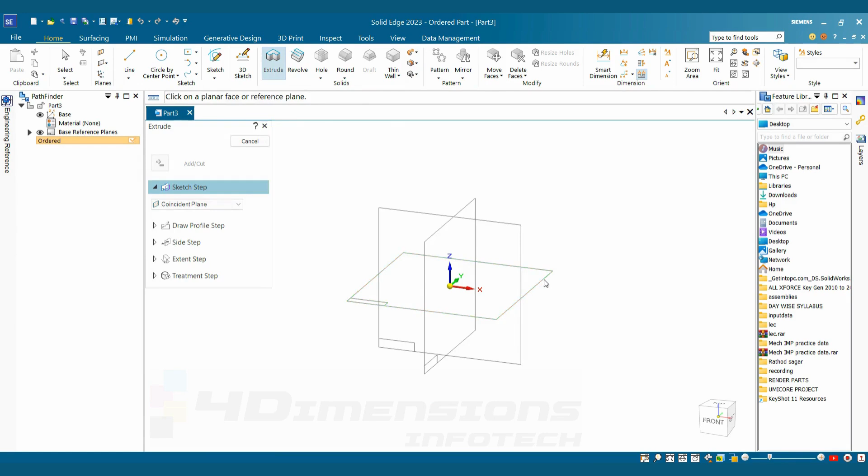So to start with the bottom plate, we are going to go to the software, select new, and say isometric part. I'm starting with the bottom plate here. Select the extrude command and go for coincident plane. We'll make the sketch for the bottom plate. It is a rectangular plate having dimensions: horizontally 250 mm and vertically the side dimension is 150 mm.

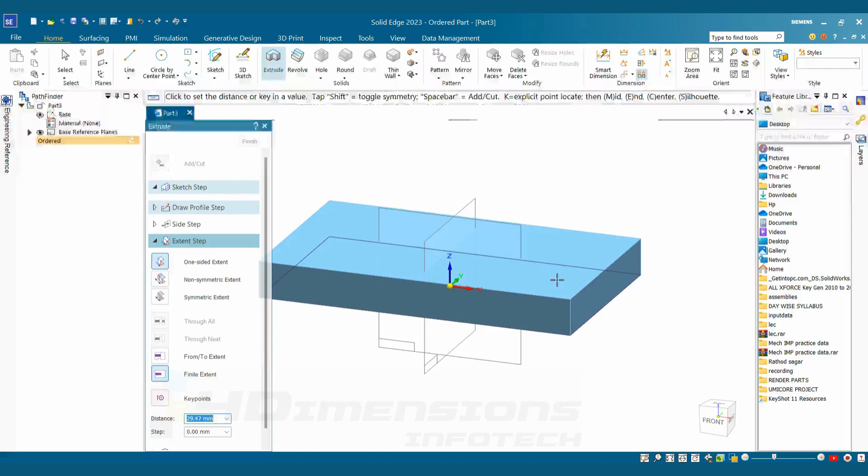Next we are going to say close sketch and extrude this part. The extrusion size was given as 30 mm, so I'm going to say this value as 30. Say finish and cancel. Next, after making this plate, we are going to go for the holes here.

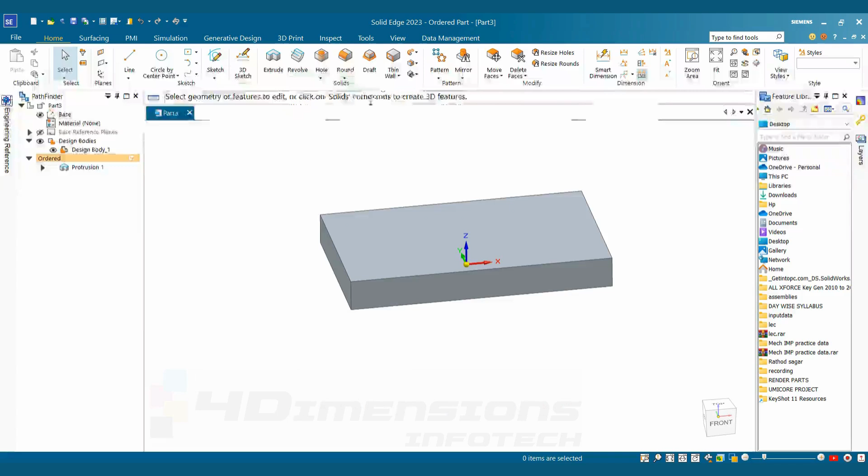So the size of this hole is given as diameter 25, placed at 4 places. Starting with the left side, we can see 30 horizontally and 30 vertically as the dimensions for placing this hole. So we can go for the hole command or we can directly go for extrude cut. I am selecting extrude cut here. The hole command is better to use when we need to make holes for fasteners; since it's just a feature, I'm taking extrude cut here.

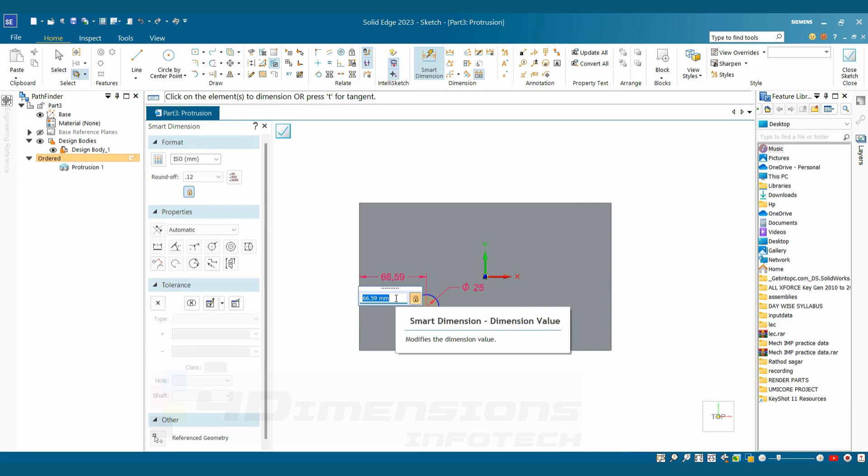Put up the values, say 25 diameter, say auto scale dimensions. Next, put the XY reference dimensions, say 30 by 30. Say close sketch and extrude cut. I'll say through all here, say finish and cancel.

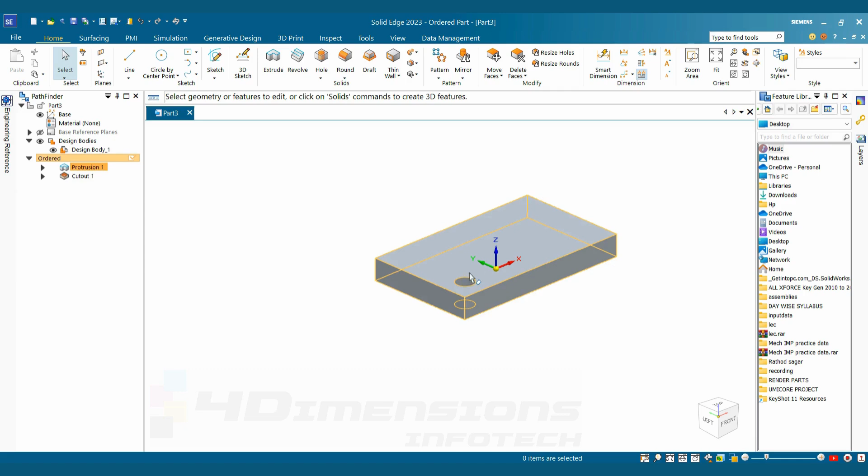Now we need to make a pattern for this feature. This is a very important point: if you are going to pattern the guide pillars on these holes, it is compulsory for us to make these holes as a pattern only. Because if we don't use the pattern feature here, the related part will not be patterned in the assembly also. That's why instead of doing a mirror or making 4 holes together, it is suggested to make the first hole and then go for the pattern command, so as to pattern the related part in the assembly also.

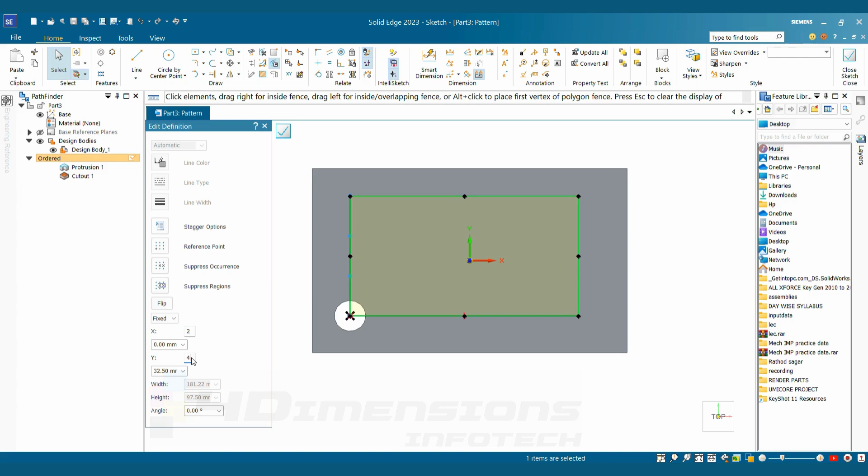Say pattern, select the required feature to be patterned, say OK. Need to select the coincident face, go for the rectangular pattern. We'll select the center of the feature and make a rectangular path here. The type of rectangular pattern I'm going to select is the fixed one. We need to show the XY entities here: number of entities in the X direction, that is horizontal, and Y direction, that is vertical.

Next we need to give the dimensions between the X and Y entities. In the X direction the dimension is going to be 190, and in the Y direction the dimension is going to be 90, measured between the centers of the feature. This vertical distance is given as 90 and horizontally it is 190. So after putting up the values and entities, go for close sketch, say finish.

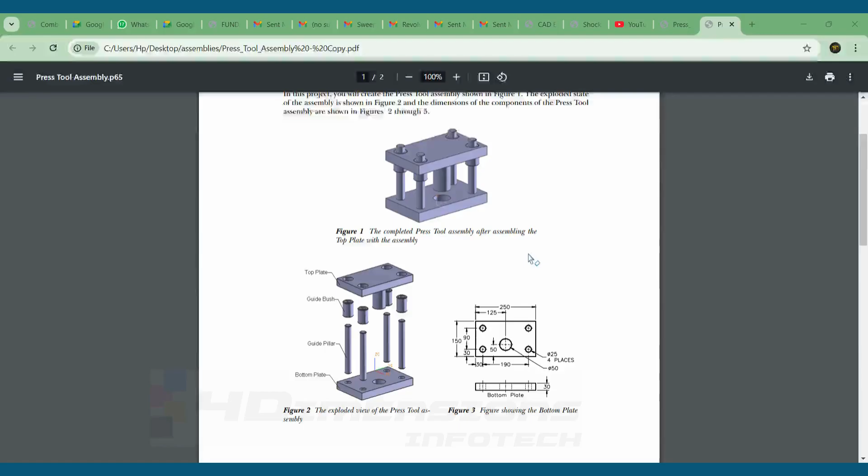Next we are going to go for this cutout. This cut was made with diameter 50. Go for sketch and make the circle with diameter 50. The distance from the bottom side for placing this hole is also given as 50 mm only. So this distance, that is 50 mm from the bottom side, the alignment is with the center origin as the hole is in the center of the plate.

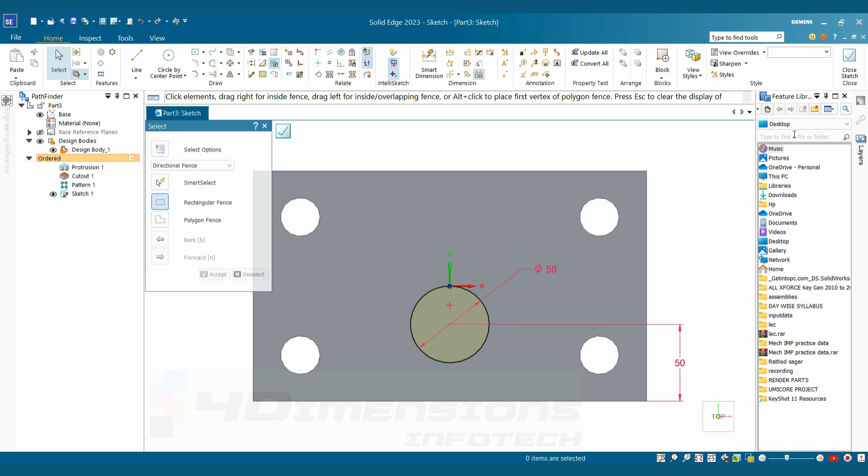So I am going to apply the relation here as vertical. Now this complete placement of the circle has been made. We are going to cut the circle here, say finish, say cancel. Go for this extrude, select the sketch, say OK. Next, say cut, finish and cancel. I'll hide the sketch here.

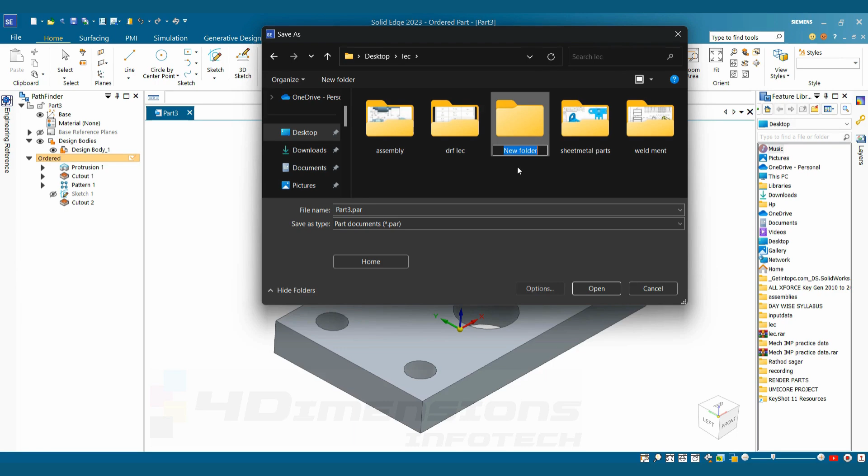So now after completing this part, we are going to save this part. I'll make one folder here, and in the folder I am going to save this part with the proper name. The name for the part was given as bottom. Here it is very important to save with the proper name given, so I am going to say bottom plate here.

Say save. We also need to apply the appearances here. I am going to go into the view tab, part painter, and this part has been completed with the appearance also now. Say save. Next we are going to go for the top plate.

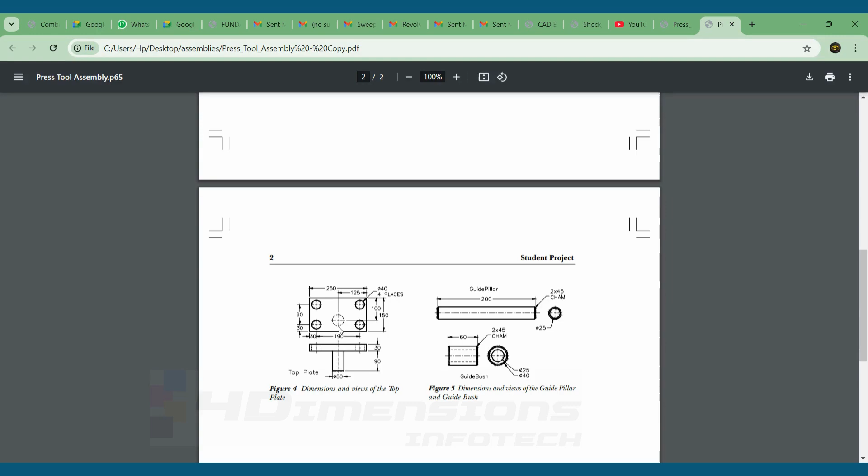It is having similar dimensions as the bottom plate except these diameters are being changed, and it is having one shaft instead of a hole. So we can edit this part only, instead of making another part. I'm going to edit this part only and say save as with a different name. So here for the cutout, I'm going to edit the dimensions here.

So instead of 25, we need to say 40 diameter. The locational dimension will be the same. We'll also remove this sketch here, and at the bottom side, I'm going to add the circle.

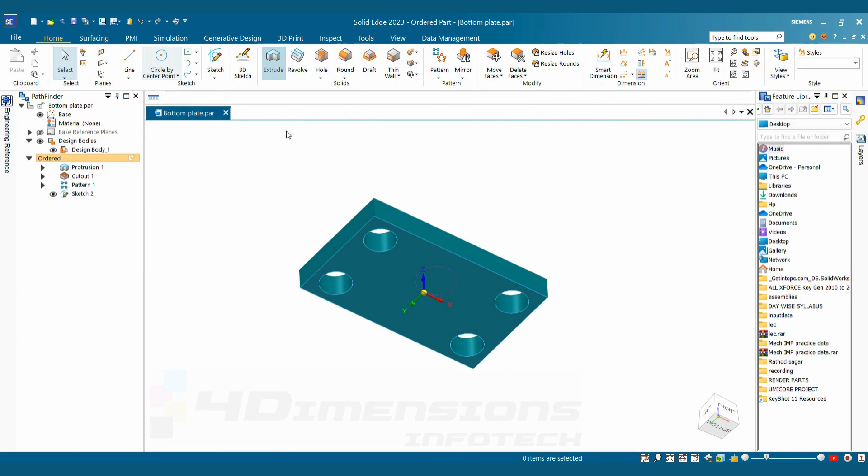Diameter will be same 50. Location from the bottom side will also be same with the value as 50. Say finish, cancel, say extrude. Select the sketch required and we are going to extrude it here.

Say one-sided extrude and end condition will be finite. The dimension given for this extrusion is 90, we can see here. I am going to say 90. We'll hide the sketch and now this top plate is also completed.

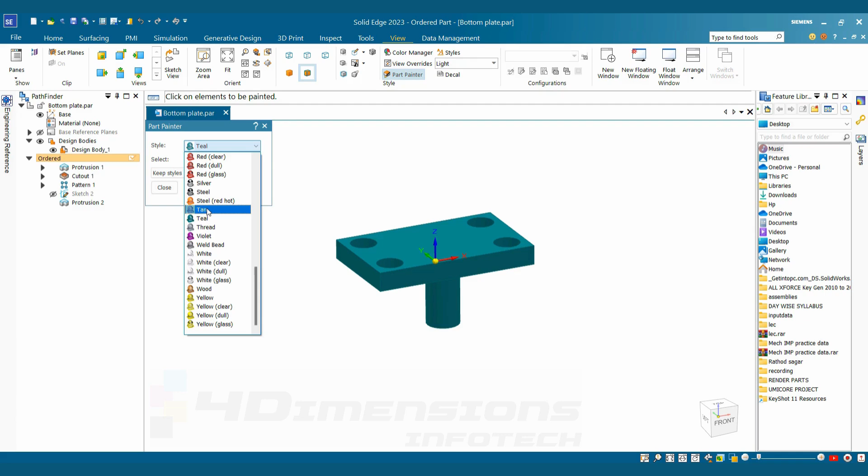Say part painter, and instead of this color I am going to say tan. Select the body, say close, and instead of directly saying save, we are going to say file, save as, so we can change the file with another name.

So now this bottom plate and top plate have been made. We are going to go for this guide pillar and guide bush now. The guide pillar having length is 200 and this guide bush is having 60.

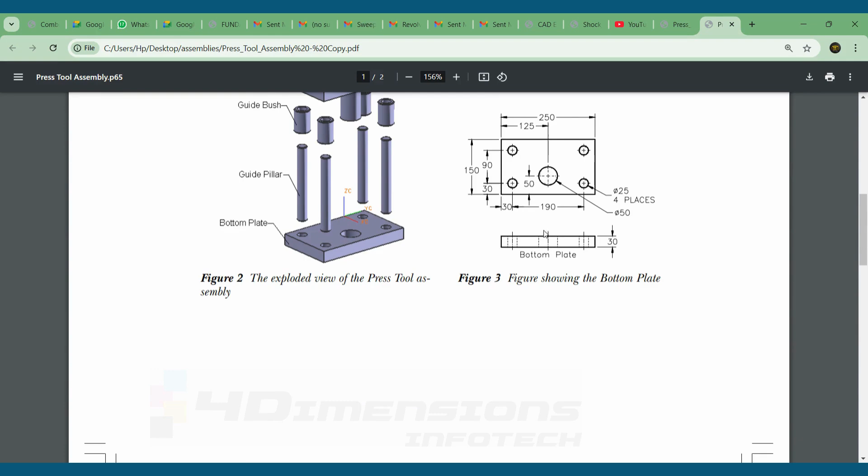Diameter of this guide pillar is 25 as it is going to be assembled in these holes. The diameter of these holes were also 25, and then the guide bush diameter will be 40 as it is going to be assembled in this top plate having the diameter of 40.

So these guide pillars will be inserted in these plates and are going to have this guide bush on the top, and lastly top plate. So while assembling we need to call first part as bottom plate, then guide pillars, then guide bush, and lastly top plate. Next part is guide pillar.

So I'm going to say file, new, isometric part, and instead of extrude we are going to say revolve this time. It is better to make any shaft by revolve command instead of making it by extrude. That's why I'm making this shaft by revolve command here.

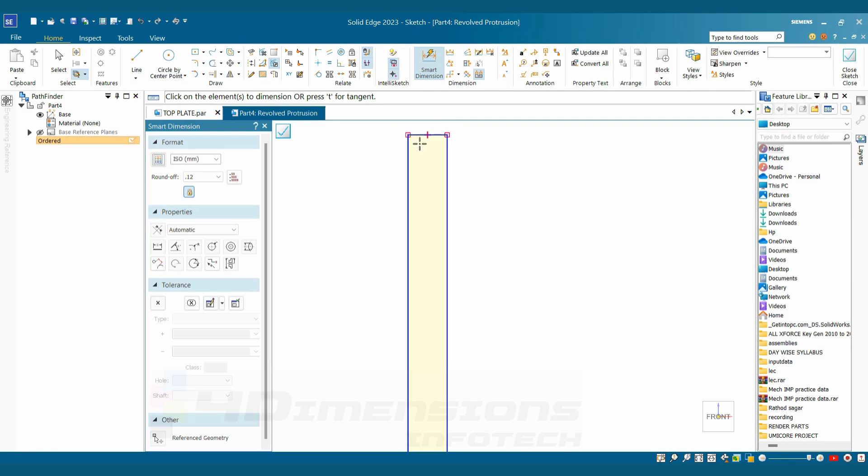I'll say 2-point rectangle. Diameter was 25, I'm going to say this radius as 12.5. As we are going to revolve this part, that's why I'm taking radius. The length was 200.

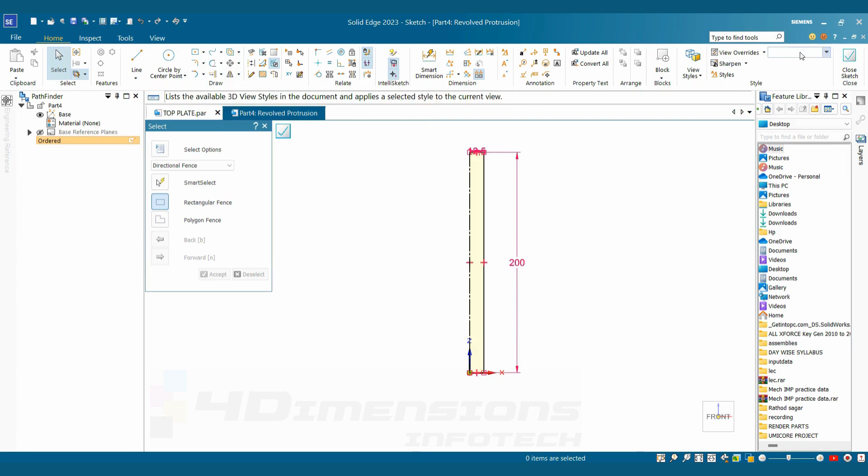Say close sketch, it will show error, as we have not selected axis of revolution. We are going to go for that command axis of revolution and select this line as axis of revolution. Say close sketch.

And you can see this part has been revolved here. Say finish and cancel. Next we are going to go for the chamfers here.

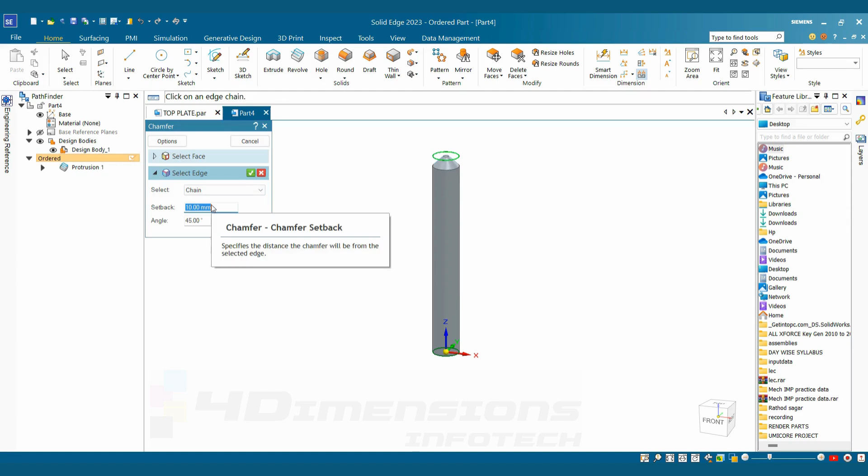We can see this guide pillar is having chamfer at both the ends of 2 into 45 degrees. So again chamfer, select the face, say OK, select the edge required, and say size as 2 into 45. Same, cancel, and repeat the command chamfer. Select the face, say OK, select the required edge, and say OK again.

Say finish, cancel. We are going to apply lastly the appearance here, blue color, say close and finish. We need to save this part with proper name as guide pillar.

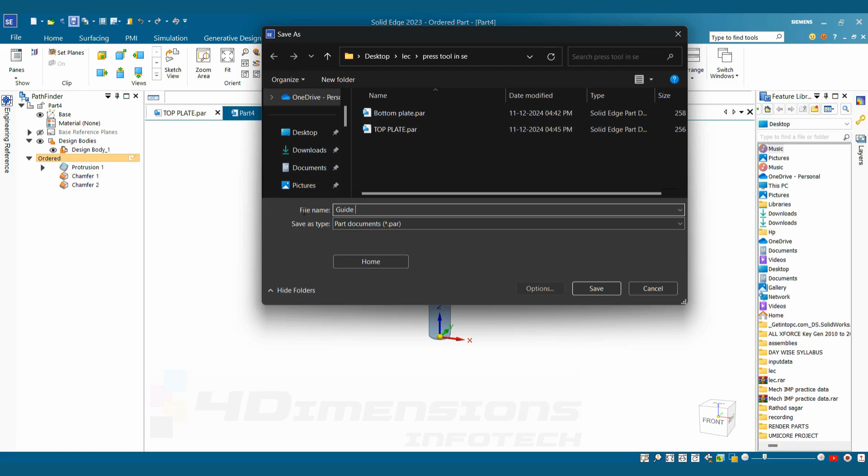Next we are going to edit this guide pillar only so as to convert it into guide bush. So for that I am going to edit the dimensions, saying dynamic edit. Instead of 200 I am going to say it's 60, as the height of this guide bush is 60, and diameter of the outer side is 40 and inner side will be 25.

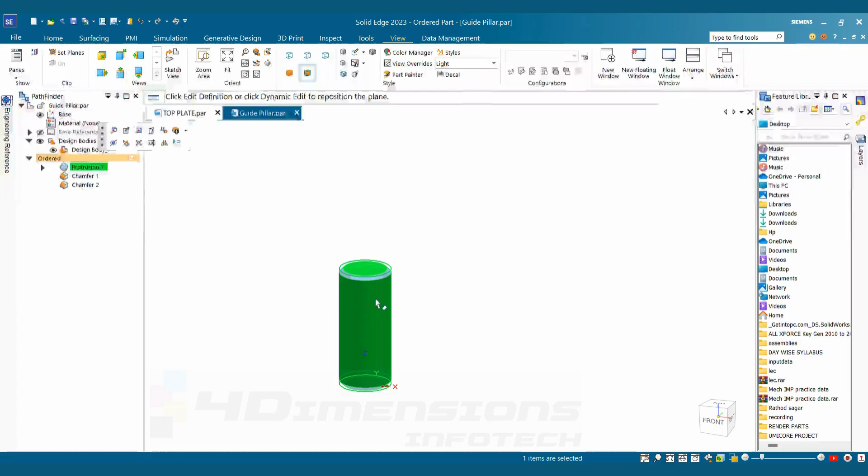So we need to make this cut. After that we need to edit the diameter also, so instead of 12.5 I'll say 20 as the radius and diameter will be 40. Next we also need to make one hole here.

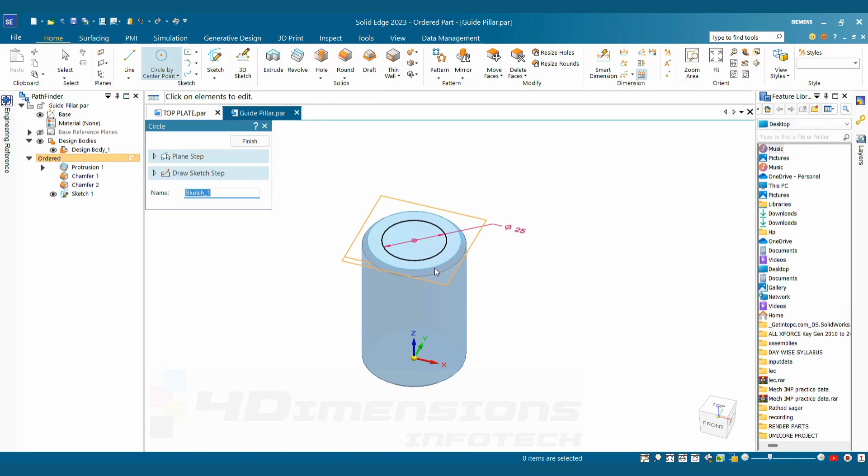So I'll draw one circle, say 25 diameter, close sketch, and now we are going to say extrude cut. Instead of add we are going to say cut here and say through all as an end condition. Say finish and cancel, so you can see here this cut is also been made.

We are going to change the appearance again, so I'll say orange to this guide bushes here. Say close, we'll save this part now, so we'll say save as again.

We just need to change the name here. Instead of guide pillar, I am going to say guide bush.

Now all the parts of the assembly have been completed. We are going to gather this part and complete the assembly.

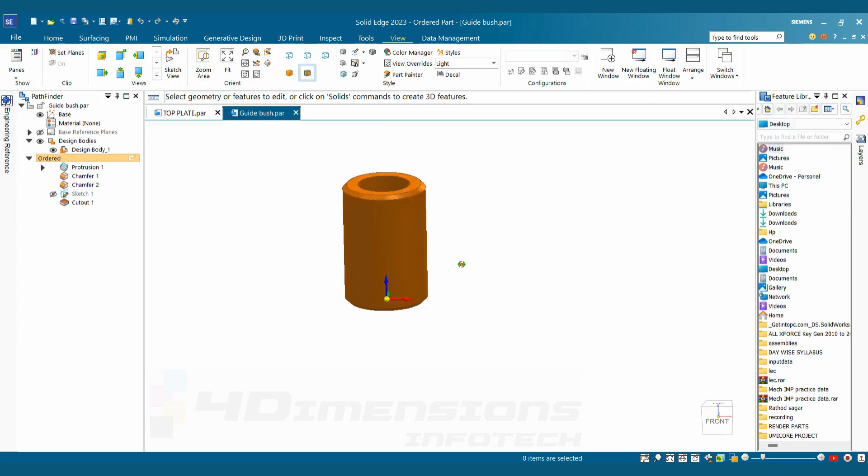So for starting the assembly, I am going to say File, New, and we are going to say ISO metric assembly. Here the ISO metric assembly has been started. Now you can see this interface. This is the model tree area, and this is the command which we are going to use to call the parts and assemble them together. So to start with, I am going to say insert components.

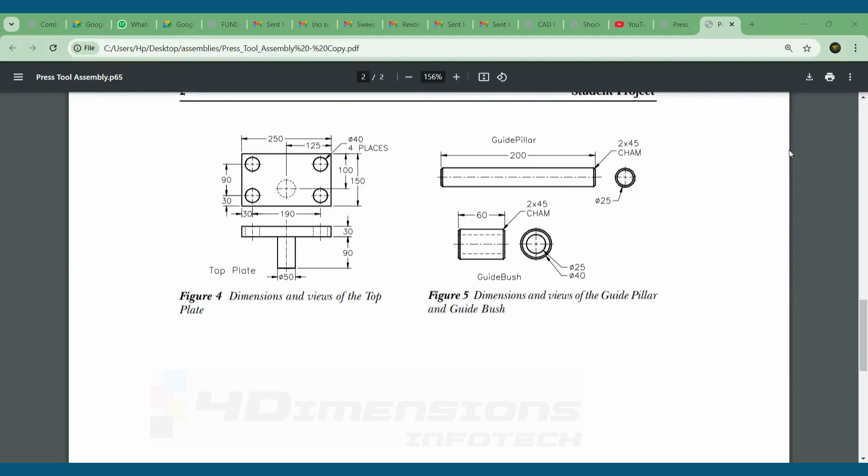We need to browse the files. So I'm going to go on desktop and browse the file by searching the folder in which we have kept this part. Here we can see the bottom plate, so I'm going to call the bottom plate first. As we can see, at the bottom side is the bottom plate, and then we are going to go for the guide pillar. So, this bottom plate - just click and drag it into the assembly zone.

Now the first part has been dragged and called here. Now these are the assembly tools known as mates, which we are going to use for making the assembly. So here you can see one mate is given, that is ground mate. Ground mate is used to make the part fixed.

So whenever you call the first part in the assembly, you can see this symbol in the model tree - the ground mate symbol has been applied on this part. And if we keep the arrow on this bottom plate, you can see a note appearing showing that the part is grounded here. So we can consider that the part is fixed here. Grounded means the part has been fixed.

But it does not have any relation with planes and all - it doesn't have any relation with origin also. It is just fixed at the place of origin, not having any relation with planes or origin.

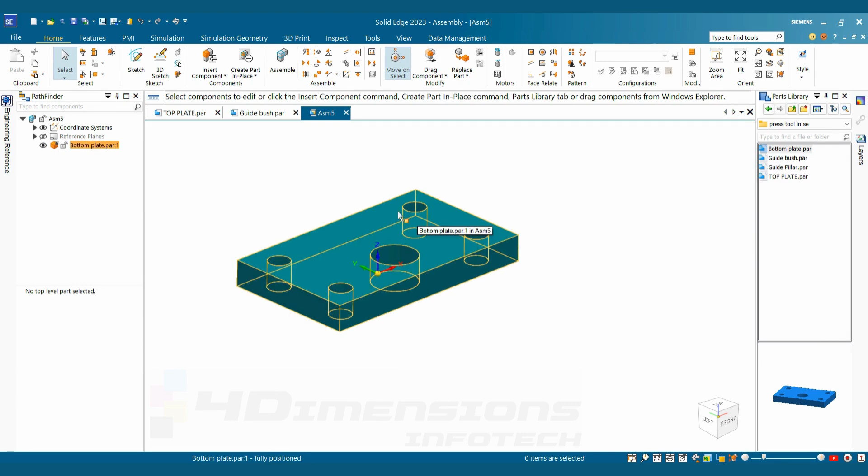So we can continue the assembly in this way also - making this base part a fixed part and then assembling the other parts. Or else we can match the planes of the parts with the assembly planes and then assemble all the parts. That option will be better, but it is a little bit lengthy process. So some companies avoid that, but we can go for that option also.

So for that we'll click on this part, and you can see after clicking this part, at the bottom left side, the mates related to the selected part are highlighted. So whenever I click on other parts also, the related mates for those parts will be highlighted in the model tree area at the lower left side.

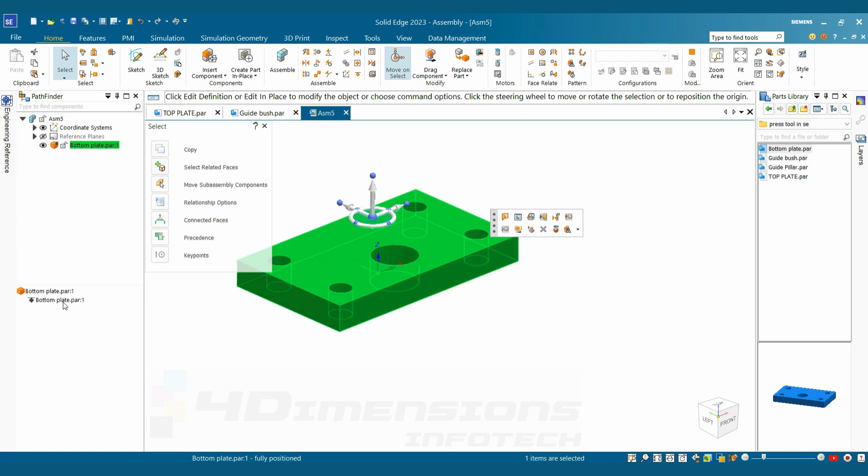So here we can see that the bottom plate has one relationship, that is ground mate. We are going to observe what effect the ground mate has on the part. So for that I'm going to select drag component and click on the part. But if we drag this part, it is not movable - it is because ground mate has been applied to that part. That's why it is not moving.

So if I want to move this part in any direction, first we need to remove the ground mate or delete the relationship. Select the part to delete the relationship and say delete. Now if I say drag component, you can see this part is movable now. So I'll place it somewhere here.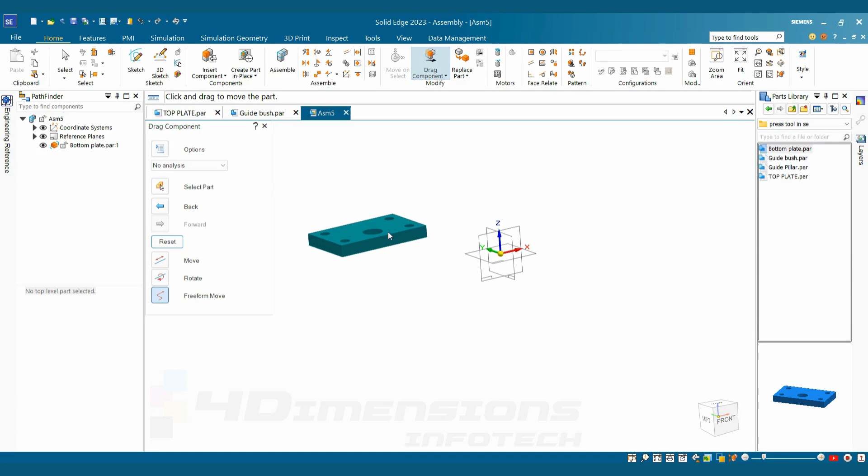And now I'm going to turn on the assembly planes here. So here you can see the assembly planes are on. We also need to show the part planes if we need here. So for that I'm going to select this part, right click on it, and you can see an option appearing - show/hide component. Select that option, say reference planes on, say apply and OK. So now the planes of this bottom plate are also highlighted here.

It is because we are going to mate this part with the origin by using planes only. We are going to apply mates on these planes so as to match the center of the assembly with the first base part. So for that I am going to use these relations here.

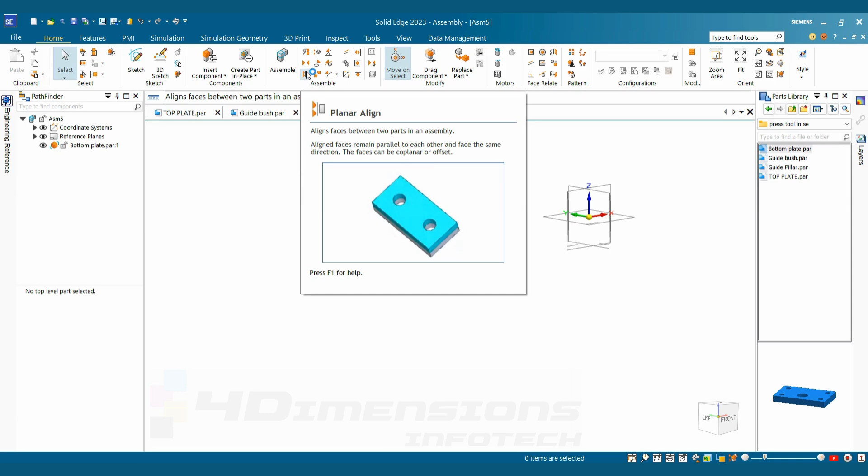So we'll start with this first relation here as planar align. This relation, or mate, is used to make the faces or planes coincide together - usually planes, that's why the name is planar align. So I'm going to use this option as planar align and then go for the selection of planes so as to match them together.

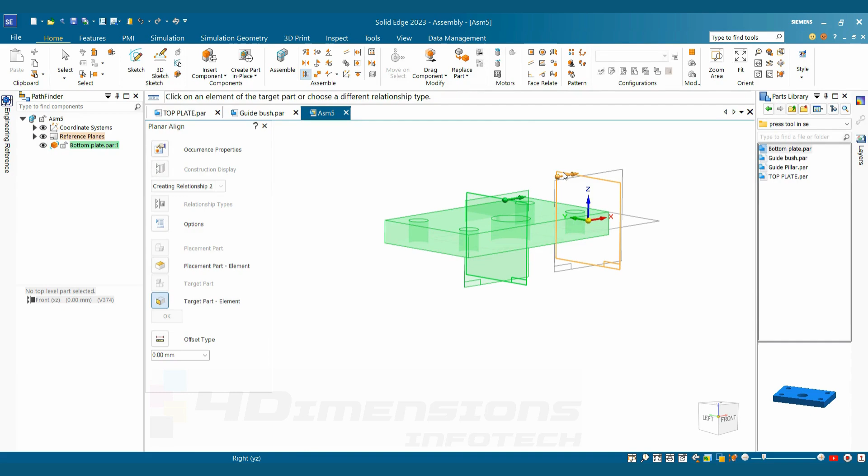For applying mates on the planes, we need to select the part planes first. So I've selected the front plane of the plate and then go for the selection of assembly planes. So here you can see front to front is matched. Next, I am going to select the part right plane with reference to the assembly right plane - so these two are also matched.

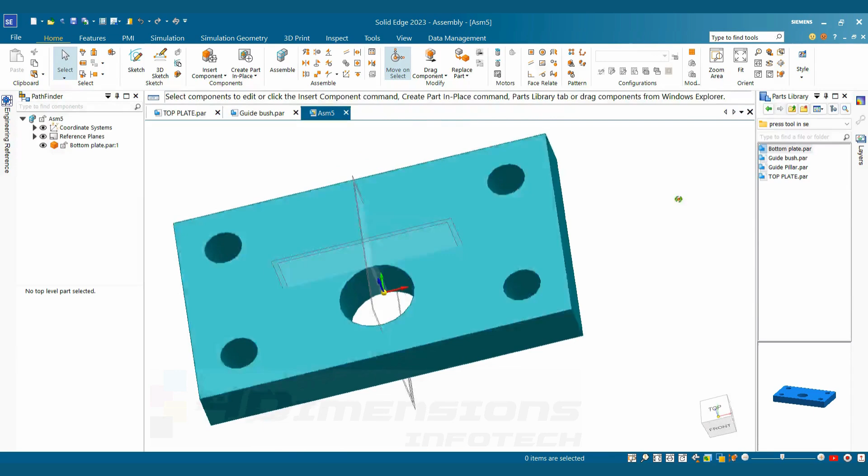Next we are going to select the part plane and the assembly top plane. Now all the planes here are matched, and this part is again aligned with the center of the assembly. You can see all the part planes and assembly planes coming at the center of this plate. It is also very important, while making this part, that we should use center references only, so as to get the planes at the center of the part while assembling. Next, after clicking this part, it will now show three relationships here, three mates.

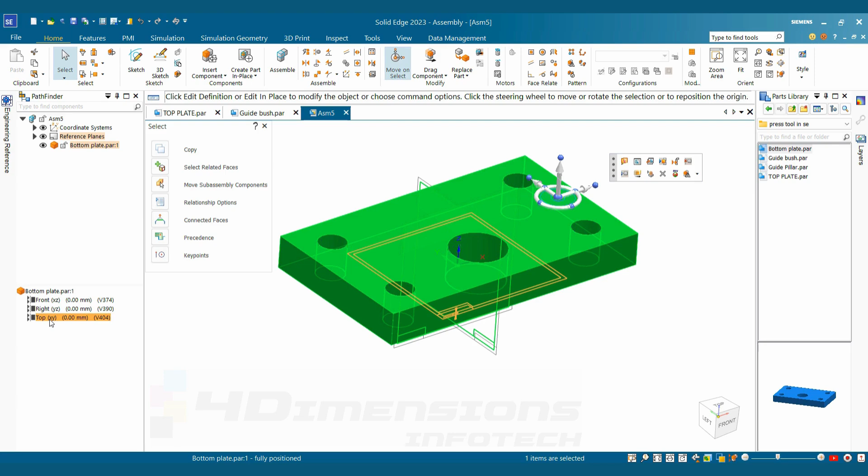That is front to front, front of assembly and front of plate. Same goes with right and top, so all the planes of the part are matched with the assembly planes. We have done this in SolidWorks also, and we are continuing it in Solid Edge, as well as it is preferable in other softwares also, that we should match the planes first and then go for the assembly.

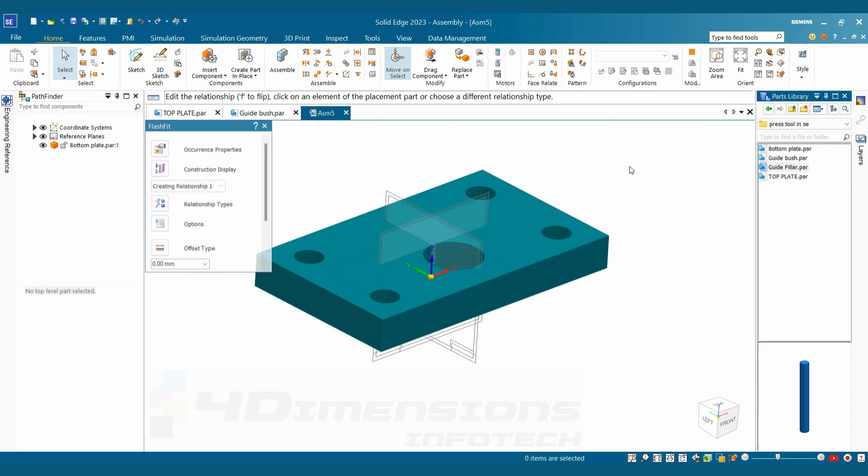Now next we are going to call the other part, so the other part is going to be guide pillar here. You just need to drag the part. While making the part, you also need to remember what are the orientations for the part in assembly, then only make that part according to the orientations of the part in assemblies. So this guide pillar was going to be assembled vertically here, that's why I've made this part in vertical condition only in part modeling.

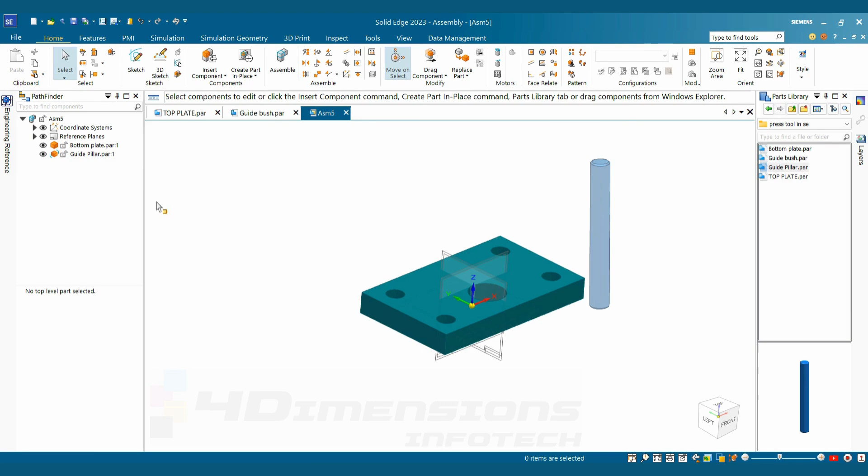Next, go for the mate. So here the mate we are going to use is axial align. We can see the demo also there. It is used to match the axis of two cylindrical parts, maybe hole or shaft. I'm going to select that axis now. You just need to drag on the part while selecting the mate, and the axis will be automatically highlighted. Just select the axis of the guide pillar and then select the axis of the hole.

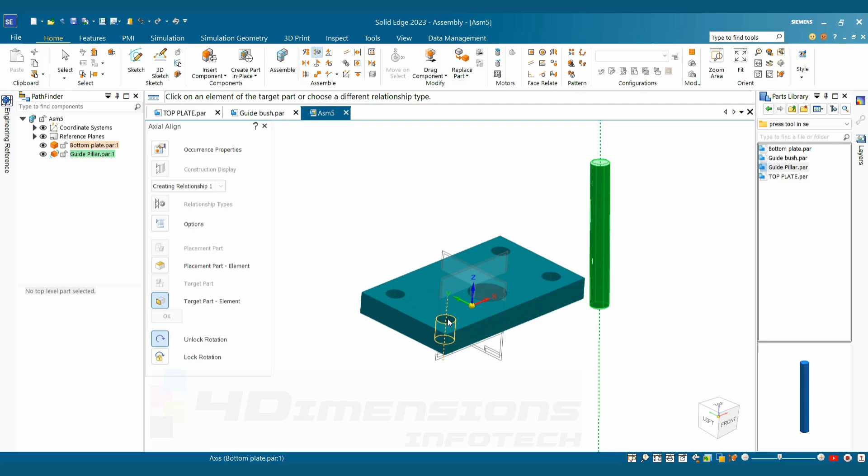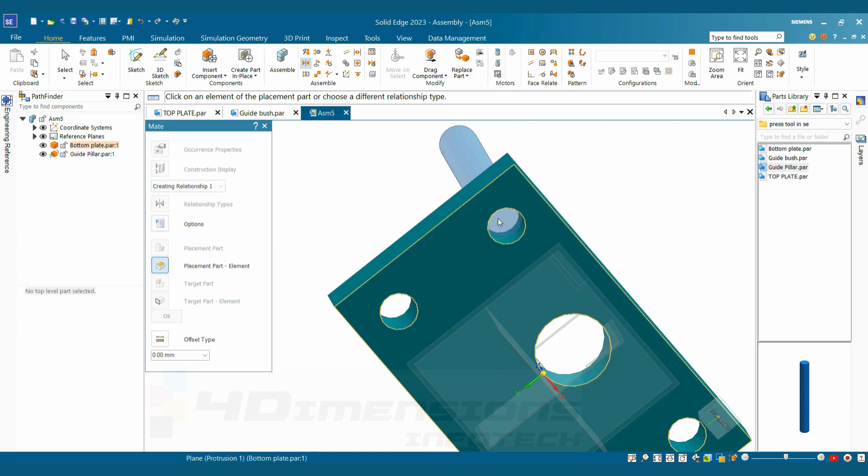Next we are going to go for the faces. So for that I'm going to change the relationship and say the relationship as mate. This relationship is used for mating the faces here, flat faces. So I'm going to go for that relationship here and select the faces. The selections for the mate will be base of the guide pillar and base of the bottom plate.

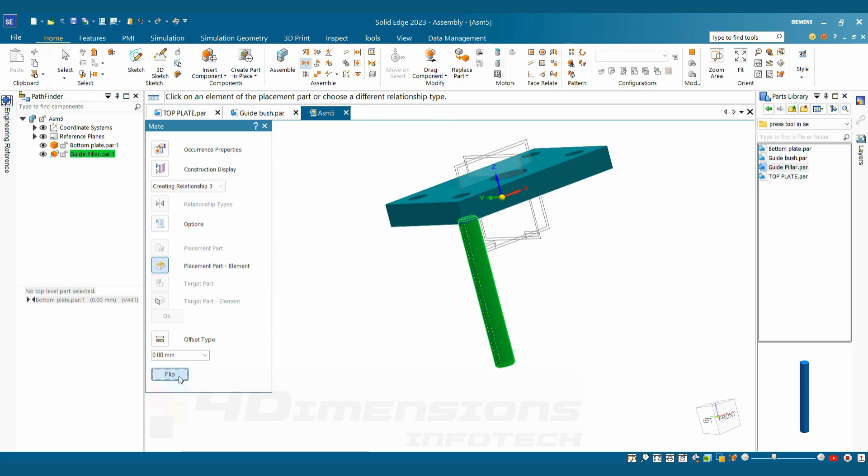Now the orientation of this guide pillar is coming at the lower side, but according to assembly we need to make it oriented at the upper side. So for that in mate only we can flip the orientation of the part. You can see here this option. In this mate options, just say flip and the orientation will be flipped here. Say right click and escape.

Next we are going to hide the planes here. Also hide the part planes. Right click on the part, again go to show hide components and say planes off. Say apply and OK. Now the planes of this bottom plate are also been hidden.

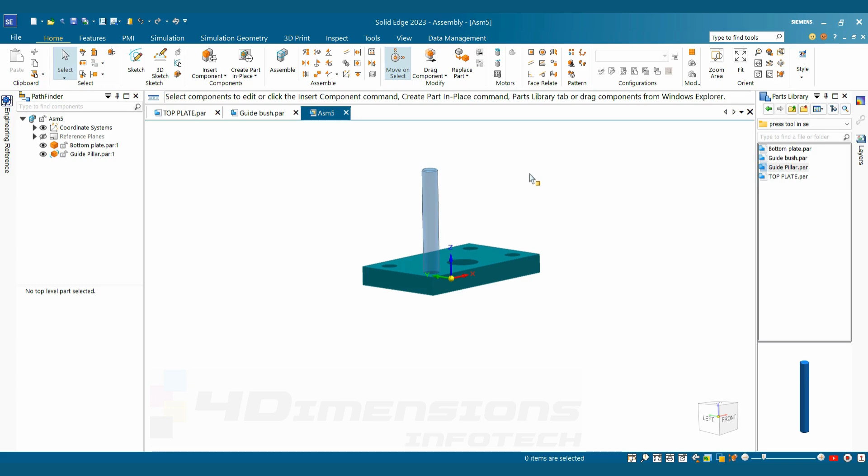Next, if we want to edit this part in between, we can make changes in the part in between also of the assembly. You just need to select the part. Suppose if I want to change the appearance, I'm going to select the part, say edit. But before that, it will ask you to save the assembly. Say yes, and we will save the assembly first, then go for edit. It is compulsory for editing that assembly should be saved first. So here we are going to say press tool assembly. Now all the related parts and assembly should be saved in same folder only.

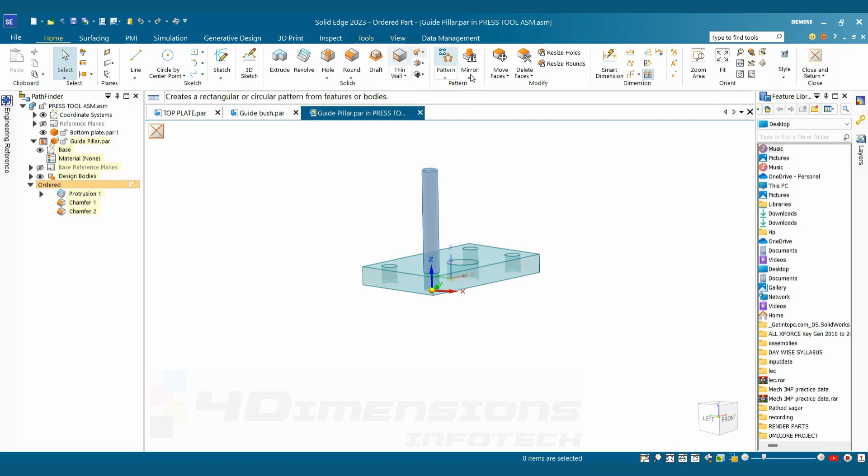After saving, we can see this upper ribbon is being changed and we are having now part modeling commands here. And these yellow colored options are nothing but the features of the part which we are going to edit. Only that related features are being highlighted in yellow color here. So here we need to change the appearance. For that select the part painter, made only yellow color, say close. You can edit any feature you required here, this extrude or both the chamfers also you can edit here. Then next after completing the editing we are going to say close and return.

Now you can see here this guide pillar, the appearance is being changed. Now one thing to be noticed here, that in front of this name for this icon guide pillar, two blue colored angles are being shown, representing that this part is not constrained properly. And also if I keep this arrow on this name, that is guide pillar, it will show that part is under constraint. One note is appearing showing that this part is not completely constrained.

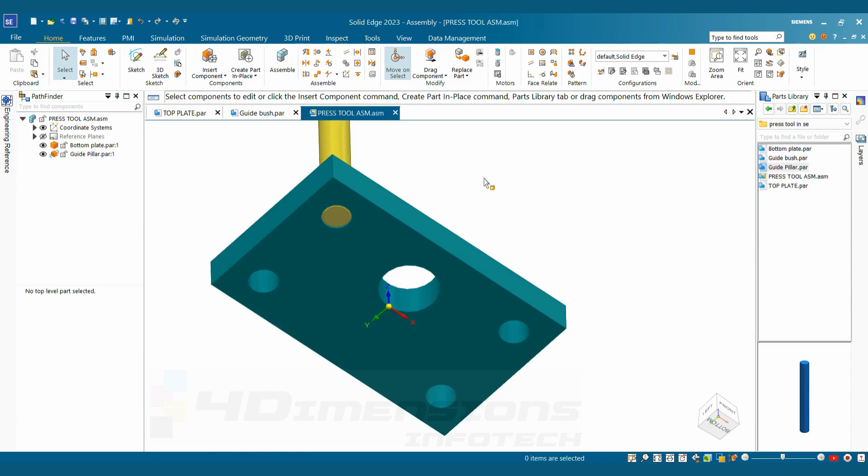So we know that we have made concentric mate first, that is axis to axis, so the XY movements were constrained. We have also constrained the Z directional movement by saying coincide to the bottom face of this guide pillar and base face of the bottom plate. But still this part is showing under constraint. It is because the rotation of Z axis is not been locked. So we need to lock the rotation of this part here, as this part is circular. Just select the part and you can see the first mate axial align was been applied. At that time we have not locked the rotation, so we can lock the rotation later on.

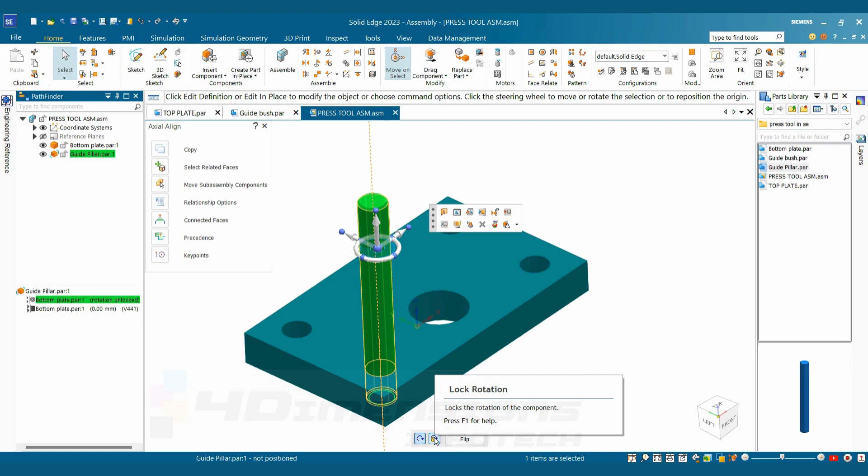We just need to select the part and the related mate will appear here. Select that mate and at the bottom side say lock rotation. You can see this lock sign being shown. Just click on it and the rotation is locked now. The icon is removed here, that blue colored angle icon, showing that the part is completely constrained now.

After constraining this part, we are going to go for the patterns here. We can do individual mates also, but it will be time consuming. So to avoid that, I'm going to say pattern. But if you are going to go for the pattern, it is compulsory that the holes made in the plate should be patterned only in part modeling. Then only you can utilize this assembly pattern.

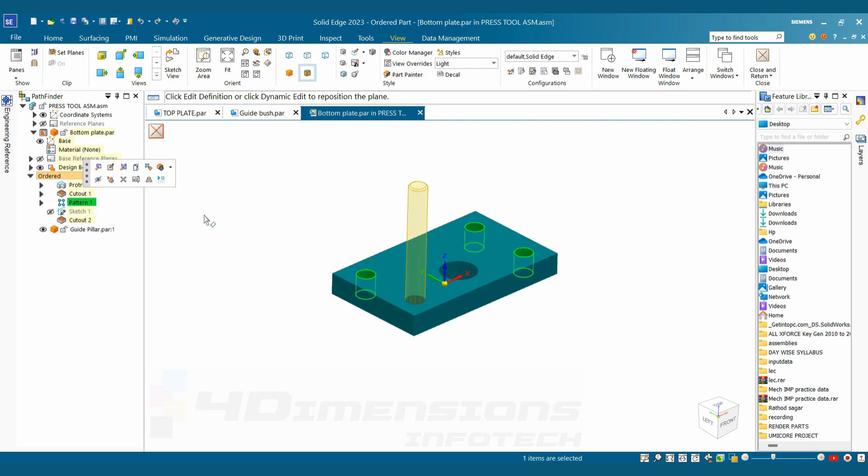So we can check whether this part has been patterned or not. I'll see the features by saying edit, and you can see here this pattern was used to make the holes. So if this pattern is shown in the model tree, then only we can pattern it in the assembly area also.

So go for the pattern command now. As we have patterned the part, I'm going to select this pillar here, say OK. Now it will ask you to select the part which contains the pattern, so select the bottom plate here. Now it will ask you to select the feature. We can see in yellow color all the patterned holes are highlighted. Select any one hole, click here.

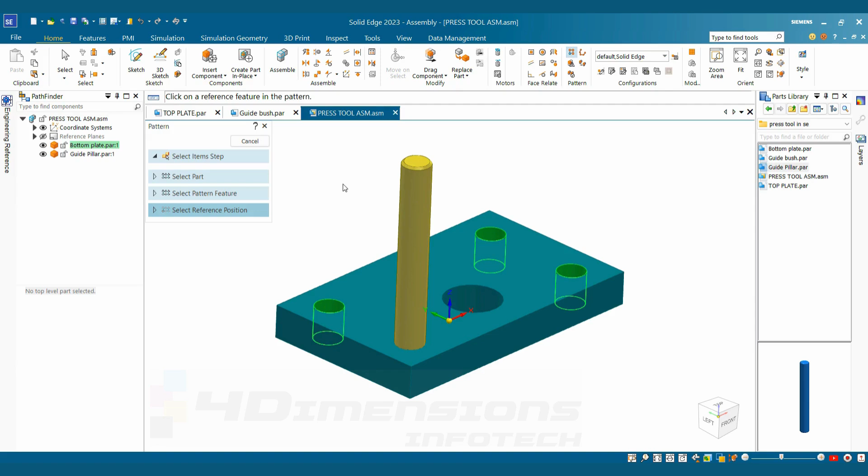Then go for the base hole. The first hole was made and then we patterned that, so we need to select that base hole and say finish. We'll undo it and see one more time.

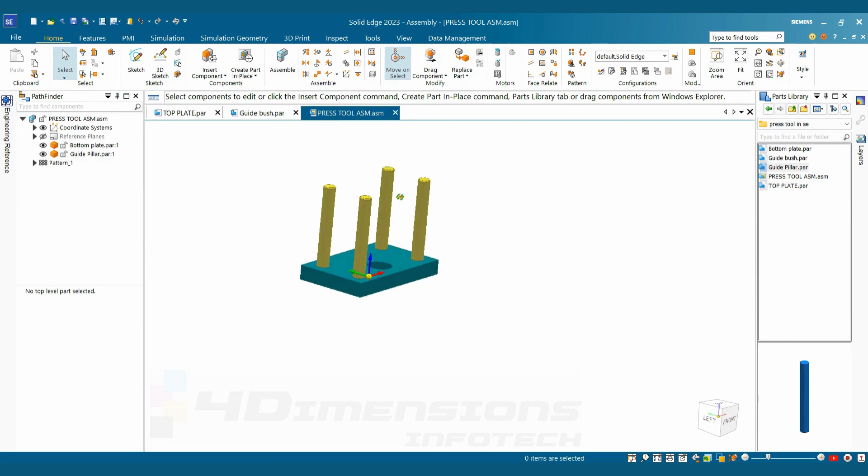Again we'll go for the pattern. Select the part to be patterned, say OK. Select the part which contains the pattern. Next select the pattern holes and then go for the base hole. Say finish, and this complete set of guide pillars are patterned now. Again, if the part doesn't contain a pattern in part modeling, then the related part will not be patterned in the assembly here.

Next we are going to go for this part, the guide bush. Just click and drag the part here. Again go for this option, axial align. Select both the axes here and say axial align. While selecting this command, after the first selection only I'll say lock rotation, so we don't need to provide lock rotation again. Then select the axis of the related part.

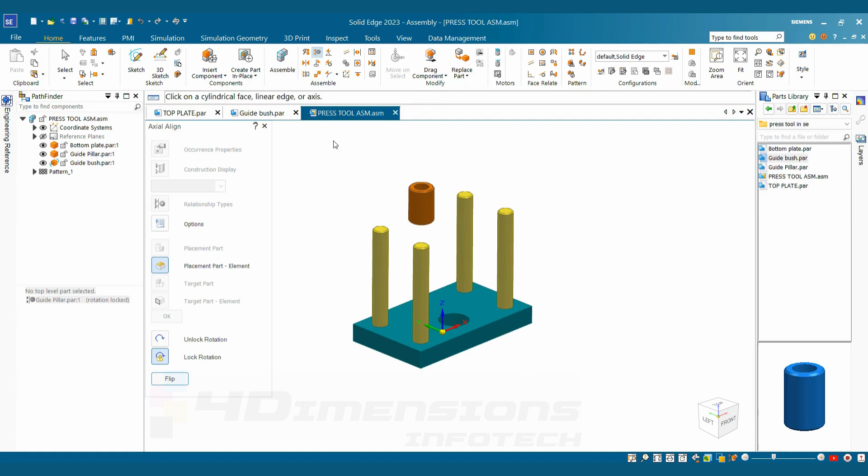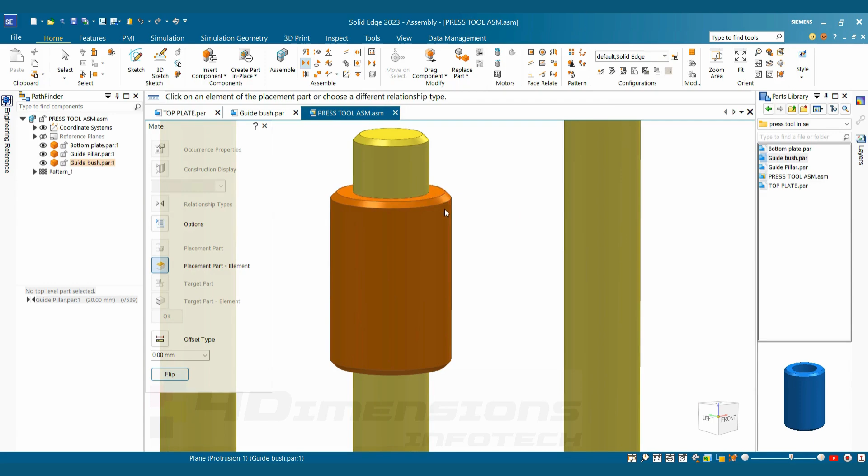Say escape. Next we are going to go for the distance mate. In coincide mate only we can apply the distance mate. So I'll select this mate option, select the face, go for the distance value first. I'll say 20 mm, and then select the second related face. I'll flip this part here, and you can see this distance is coming 20 from the above flat face to the flat face of this guide bush. Now we can see this part is also completely constrained.

How can we judge that the part is completely constrained? You can see here no blue angle marks are coming around the symbol of this guide bush part, and one note is also coming showing that the part is fully positioned here. You can see it on the cursor side in the model tree area.

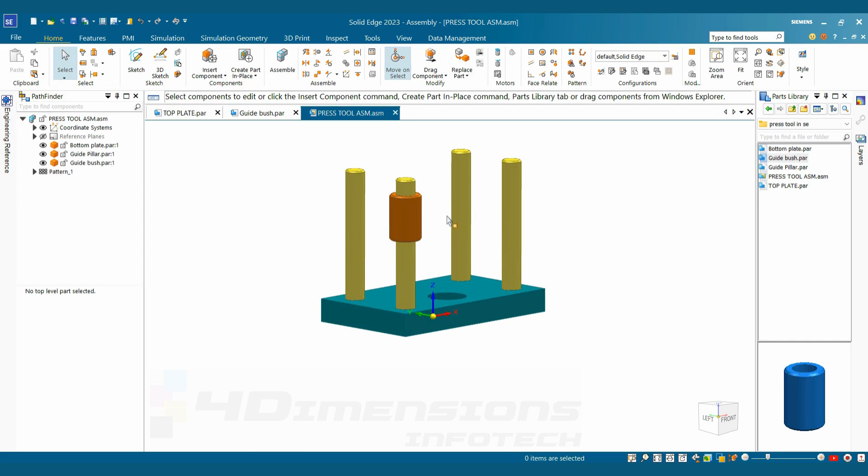After that I'm going to say pattern again. Select the part required to be patterned, select the part which contains the pattern, select the holes made by pattern, and select the base hole. Say finish and cancel.

So here you can see we have almost done with the assembly. We just need to select one more part and assemble it there. For that I'm going to select assembly again, go for this part, the top plate, and drag and drop it here.

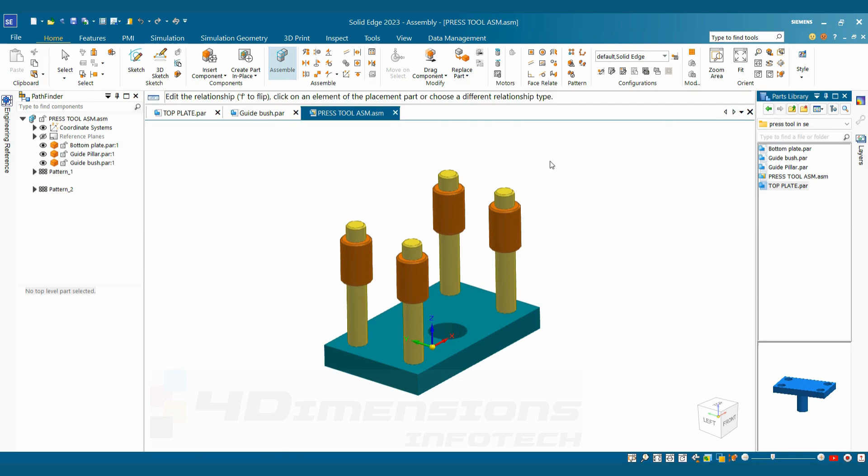Now we will select the related mate here, that will be axial align only again, so this axis of this shaft and axis of this hole should be aligned. Next again go for axial align only, select the axis of this hole and this guide bush. Next we are going to go for this mate, the mate option.

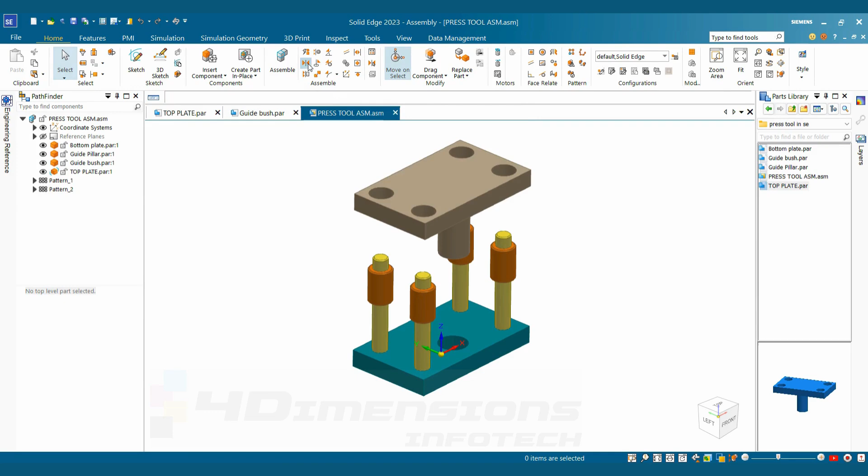Select the top face of the top plate and top face of the guide bush. Say flip, sometimes the orientation gets flipped by default only, so we just need to again click on this flip tab. So we can see here this part is completely assembled here.

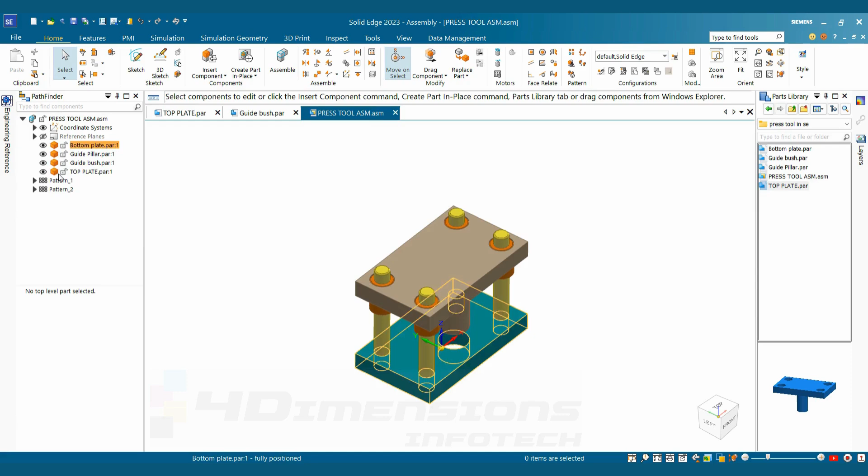Now this complete assembly is fully defined, as it is not having any blue colored symbol on any part. We have also deleted the relation that was grounded here. Instead we have used planes of the assembly and planes of the part so as to align the part in center. So this was the press tool assembly, and these were some basic terms to understand while making the assembly. We'll continue with further mates also. Till then, thank you.